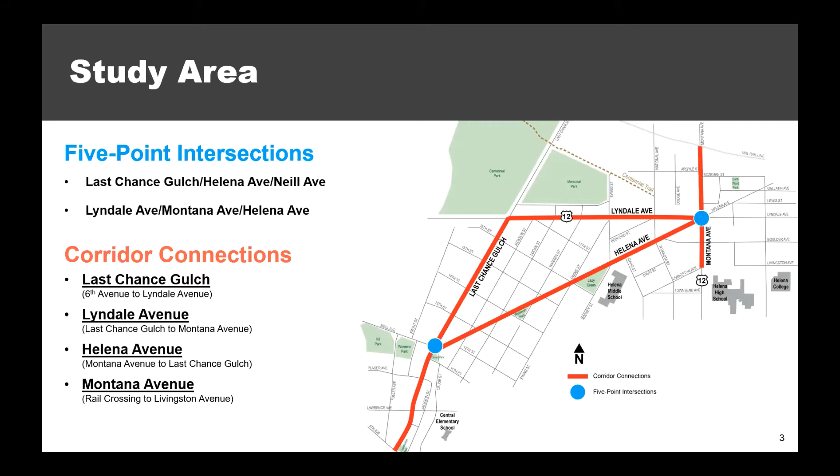So next, I mentioned that we conducted public and stakeholder outreach activities earlier in the process to understand the issues and concerns from your perspective. Starting back in June 2018 through the end of last year, we offered a variety of public and stakeholder activities just to request input on things like the focus for the study. We wanted to provide an overview of our study process and share existing conditions findings. And then we also discussed some of our initial areas of focus.

And these conversations helped us understand the issues and the needs, and we received valuable feedback on improvement areas. So from those public and stakeholder outreach activities, we heard a number of common themes that were repeated by quite a few individuals.

And most of the comments that we heard related to things like ensuring safety for all users, improving pedestrian and bicycle connectivity and accessibility, improving vehicular mobility and connectivity. We also heard a lot about extending Centennial Trail to the east across Montana Avenue, and the importance of preserving the function and access and parking for businesses and private property. And then lastly, we also heard about the need to improve wayfinding and aesthetics through things like signage and general beautification.

So with that, I'm going to turn it over to Scott Randall, who will discuss the recommendations included in the study. Great, thank you, Sarah. So I'm going to move into a discussion of the study recommendations, kind of the meat of the report here. So based on our findings and the feedback we have received throughout this process, we identified about 16 locations where we have some sort of a recommendation within the study. The recommendations range from pedestrian, bicycle, and general non-motorized improvements to intersection improvements, street enhancements, and more major reconstruction recommendations.

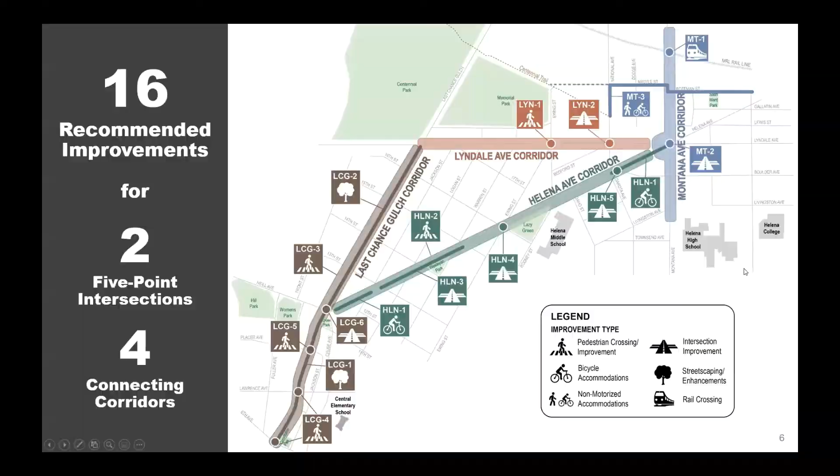So beginning with the Last Chance Gulch corridor, our first recommendation focuses on the segment between Neill Avenue and 6th Avenue, so the one-way segment. For this study, we were tasked with evaluating that portion of Last Chance Gulch to see if it should be converted to two-way traffic or if the current configuration should remain in place. So two-way conversion has been contemplated for a number of years in the community. And with this study, we were asked to figure out what the best solution would be to optimize business access and maintain traffic circulation and understand the impacts of what any changes would have on the surrounding corridor.

So we looked at a variety of configurations in detail. What we found is that most options would perform fairly well from a traffic standpoint if we're just looking at vehicles. However, the existing configuration as it is today provides valuable access for businesses, for parking, for loading and unloading and delivery needs. And also when we think about non-motorized accommodations, we felt that bicycle routing through the downtown area could be better accommodated on parallel routes such as Cruse and Fuller Avenues instead of focusing them on Last Chance Gulch. So our outreach with the public and with stakeholders also didn't really identify strong support for converting the current configuration to two-way traffic flow, nor was there support for removing a travel lane or adding additional bike facilities on Last Chance Gulch itself.

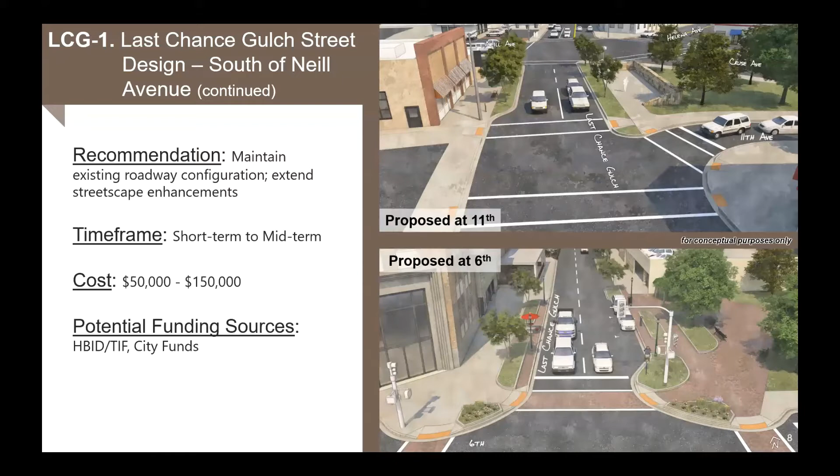So for these reasons, the study recommends maintaining the current two-lane one-way configuration and looking for opportunities to enhance what is out there today. So more specifically, we noted some recommendations to extend some streetscaping enhancements on Last Chance Gulch, particularly between Placer and Neill. This would help provide more of a gateway feeling into the downtown core and create more uniformity along the corridor. This recommendation could be more of a short to midterm project with a relatively modest cost as opposed to full reconstruction.

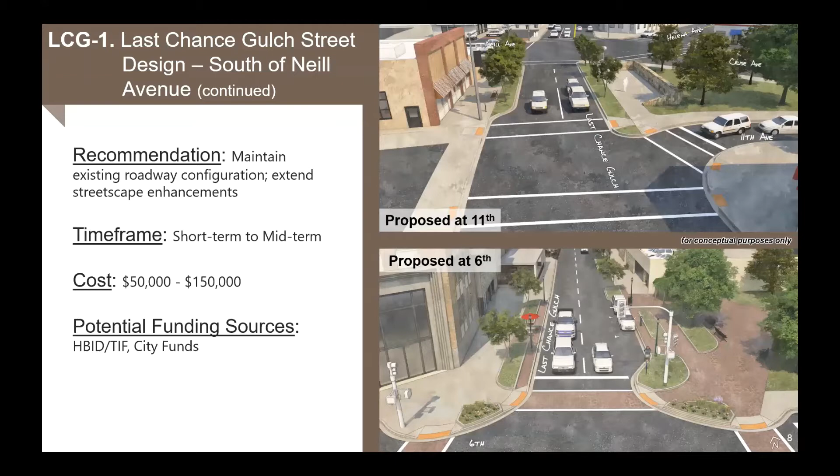So moving on, we also looked at the potential for improvements on Last Chance Gulch to the north of Neill, between Neill and Lyndale Avenue. Although we don't believe modifications to the roadway configuration itself are needed, we are recommending that streetscaping improvements be made to enhance the roadway corridor and better match the character and context of the area. The existing facility is pretty wide and feels fairly disconnected from the rest of the downtown and rest of Last Chance Gulch. So there is opportunity to enhance the roadway to improve the look and the feel of the corridor.

Improvements could include better signage, lighting, street trees, landscaping. You know, in this area, there's on-street parking up and down the corridor, but it's fairly limited in its use and need in certain areas. So some areas are heavily used for on-street parking and some are not.

So I think there's some opportunity to maybe reimagine some of those spaces into more green space, to provide for a traffic calming effect and to provide buffered protection between vehicular lanes and the pedestrian facilities. So this is a recommendation that wouldn't be done overnight, likely wouldn't be done as redoing the entire corridor at once, but could be achieved as smaller standalone pieces or as redevelopment of the area occurs.

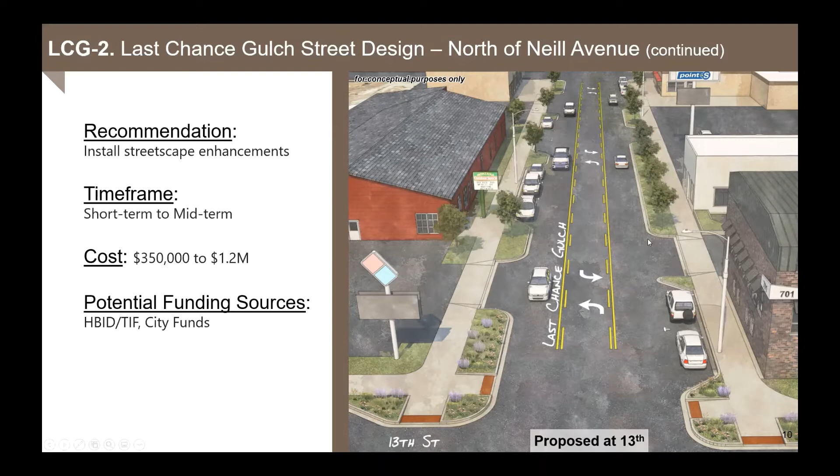The next recommendations along Last Chance Gulch corridor focus specifically on pedestrians. We observed and heard a lot from folks about the condition of some of the sidewalks. Some of the concrete is cracked or chipped. There's some accessibility barriers. And so in general, we're recommending that general sidewalk improvements to address these hazards are made. We feel that these improvements would be very beneficial, given the pedestrian focus in the downtown core.

We also looked at the major intersections, in particular the two signalized intersections with 6th Avenue and with Lawrence Street. What we're recommending at those intersections is what's called a leading pedestrian interval, which is a change in the signal timing, which actually gives a bit of a head start or priority to pedestrians crossing versus giving a green light to vehicles and pedestrians at the same time. You would actually give the pedestrians about a 3 to 5 second head start before you give a green light to vehicles. This would reduce the amount of unprotected time pedestrians spend in the intersection and also increases their visibility.

And if we move just up the street to the intersection with Placer Avenue, this is another location where we're recommending some improvements specific to pedestrians. We're recommending that the intersection be upgraded to comply with current ADA standards, which includes curb ramps and bulb outs and some enhanced crossing treatments there to more match the intersections at 6th and at Lawrence Street.

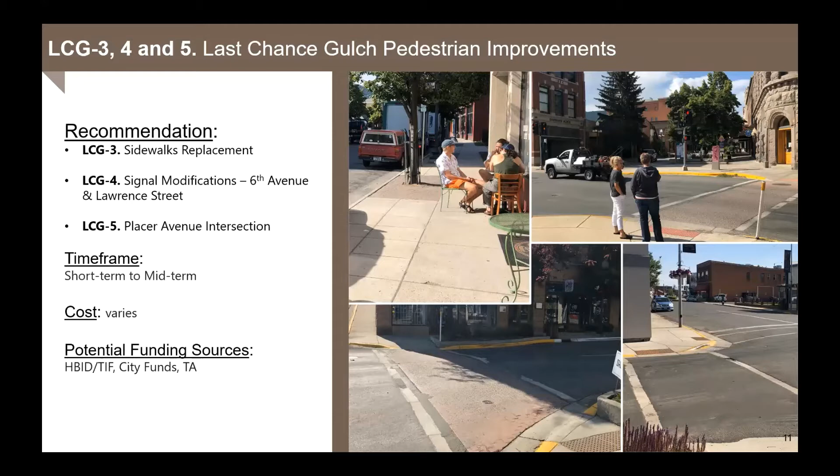Additionally, the intersection is not particularly friendly or easy to use for pedestrians or bicyclists, especially with the awkward triangle refuge near the Helena Avenue right turn slip lane. So as a potential short-term solution, we're recommending that you look at maybe removing that right turn slip lane and that triangle refuge at the corner of Cruse and Helena. This would allow for the corner to be reconfigured to improve the crossing for pedestrians. Additionally, there's an opportunity for some beautification on the north leg of Last Chance Gulch as you enter the downtown core. While this option wouldn't improve traffic conditions or really change specific conditions for vehicles, it does offer small scale improvements to better enhance the intersection and make it more walkable.

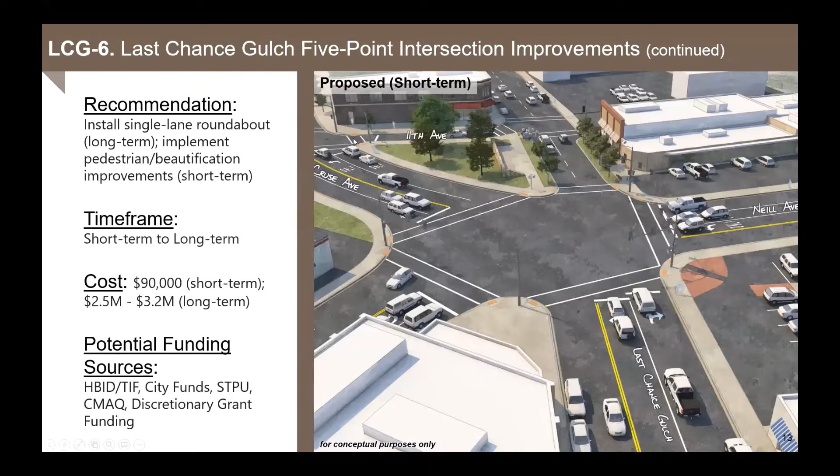We also evaluated a lot of long-term options to address long-term identified concerns. So we looked at a number of options from modifying the traffic signal as it is there today to closing the 11th Avenue spur into a roundabout. And the results of the evaluation process resulted in a roundabout being identified as the preferred configuration for a number of reasons. Over the long term, this option is projected to optimize vehicular operations, non-motorized access, and would offer the opportunity for beautification and to have the intersection serve more as a gateway feature into the downtown.

Also, with a roundabout, the 11th Avenue spur could be closed, which could provide for an opportunity to enhance the Cruse Park. This slide shows a rendering of what that could look like at this intersection. The configuration would operate very well now and into the future, given our existing and projected traffic volumes. It would also minimize impacts to adjacent properties. So I think that this configuration would still maintain most business access points while improving the intersection from an operational and non-motorized standpoint.

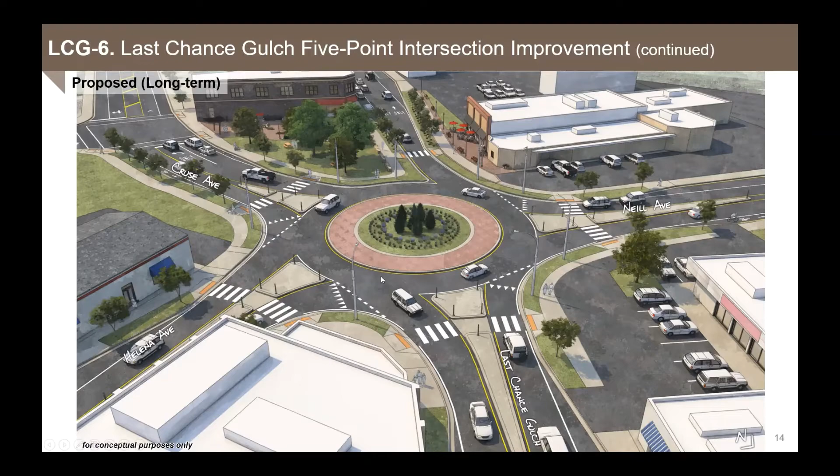Moving on to the Lyndale Avenue corridor, we focused less specifically on this roadway as it is part of US Highway 12 and in the jurisdiction of the Department of Transportation and not the city. However, we did hear quite a bit about some of the difficulties, particularly with crossing this roadway as a pedestrian. There is currently a marked crosswalk at the intersection with Warren Avenue, although it has been noted it's very difficult to see. It's very basic with just some pavement markings and some signing, and does not provide enough protection for crossing pedestrians.

So with that in mind, we took a broader look at the corridor to identify the best spot for a pedestrian crossing. In the end, we're actually recommending that the current crossing location at Warren be removed and an enhanced crossing be developed at the intersection just down the road at Ewing Street and Rodney Street instead. This spot provides an opportunity to better connect with Centennial Trail, the baseball field, and Helena Middle School, and is actually the center point between the intersection with Last Chance Gulch and the 5-point intersection to the east.

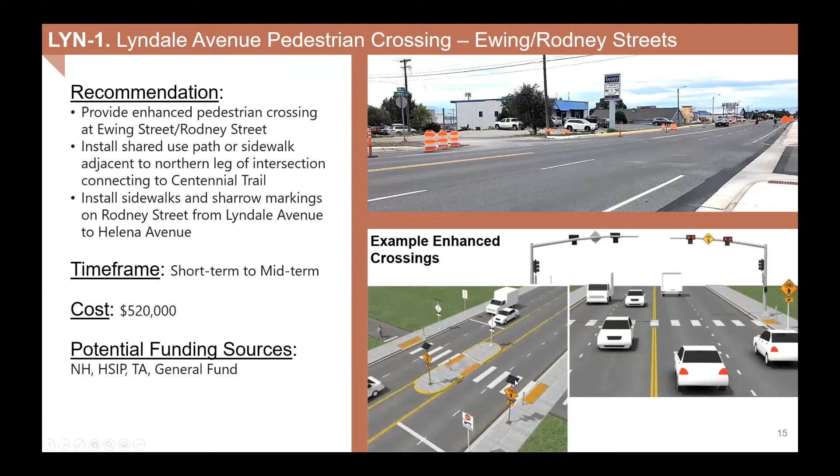The bottom images shown here are examples of what an enhanced crossing could look like. We don't know exactly, depending on certain considerations, what that would look like. But here's a couple ideas of what an enhanced crossing could be versus the crossing as it is today, which just has some signage and pavement markings. So additional investigation would be needed moving forward to determine exactly what that looks like. But here's a couple ideas.

So next up is Helena Avenue. The next two recommendations are for improvements to the bike and pedestrian facilities on Helena Avenue. Currently the bike lanes end quite a ways before the 5-point intersections on each end without much of a transition or warning to bicyclists. This recommendation would extend the bike lanes closer to the intersections and provide some transition signage to guide bikes to take the travel lane to maneuver through the intersections.

And from a pedestrian standpoint, there's several locations where sidewalks are missing or damaged or where accessible features are not provided. In several cases, parking lots are paved right up to the curb line, which provides no separation between vehicles and pedestrians. In this study, we've identified quite a few spot locations for sidewalk and curb ramp improvements. This may be accomplished in the short to midterm and would greatly enhance access and connectivity on this corridor for pedestrians.

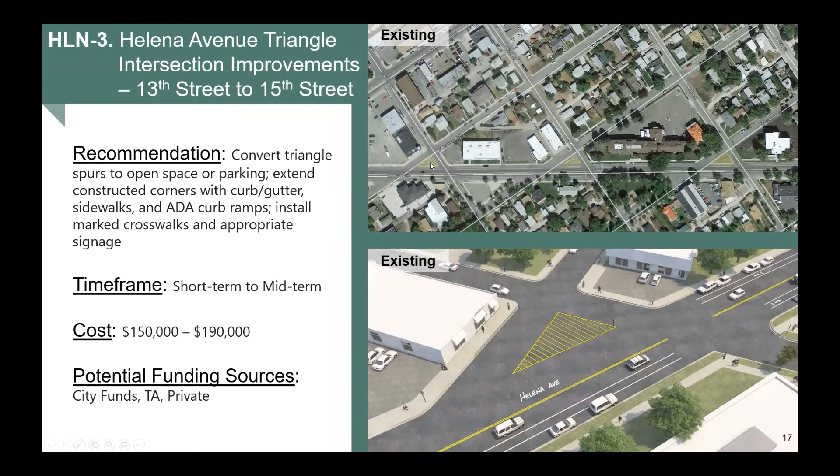To improve these three spots, the study recommends extending the curb line, adding marked crosswalks and bulb outs as appropriate to improve pedestrian visibility and comfort, and converting the former triangle areas to parking or green space to benefit adjacent businesses and residents. This slide shows a couple of examples of what these could look like. The top one shows the extra space of the triangle intersection reimagined into additional building frontage, while the bottom one shows what it could be if it was envisioned more as a public space.

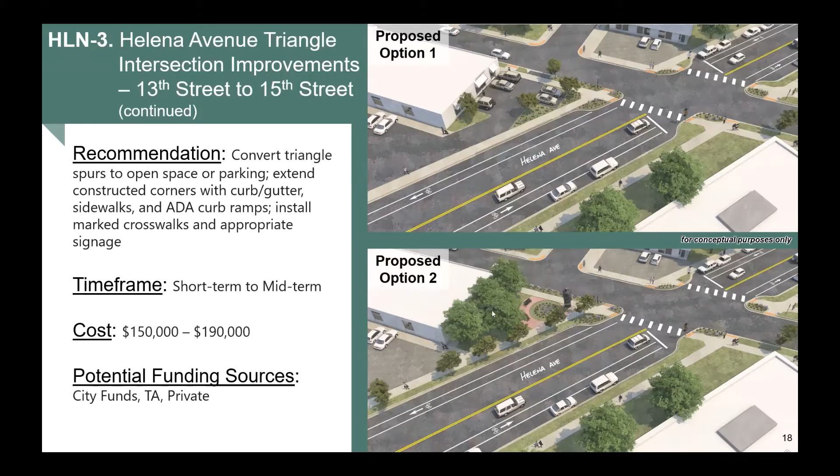The next couple of options are also aimed at some of the skewed intersections along Helena Avenue. At the intersection with 16th Street and Ewing Street, for example, there are long crossing distances here as well. The intersection operates almost like a 6-point intersection given how closely spaced all of these intersections are.

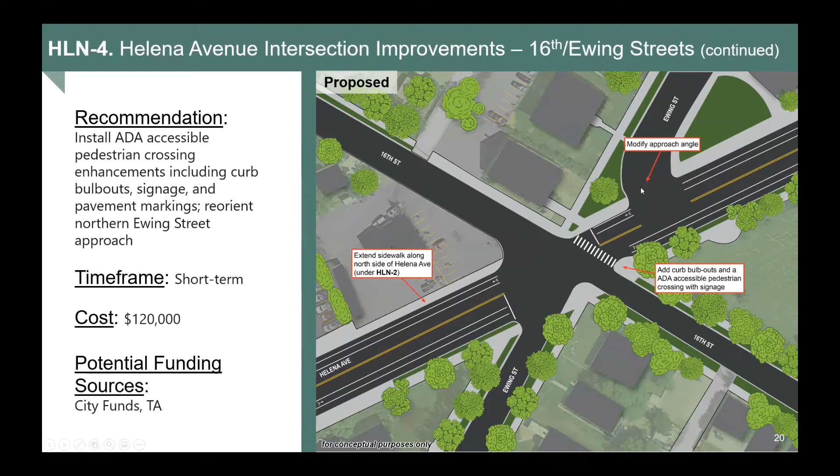To address some of these poor geometrics and some of the needs for pedestrians, the study recommends providing a marked crosswalk with curbed bulb outs and ADA ramps to improve pedestrian crossing visibility and comfort. Additionally, we suggest modifying the northern leg of Ewing Street to intersect Helena Avenue at more of a right angle to improve visibility and give better definition and distance from the intersection with 16th Street.

Moving further northeast, the National Avenue and Boulder Avenue intersection also has some of the same problems and challenges in terms of its awkward intersection angles, poor visibility and long crossing distances for pedestrians. So what we're recommending here is to, again, install a marked crosswalk across Helena Avenue with curb bulb outs to make it safer and more comfortable for pedestrians to cross. We'd also suggest squaring up Boulder Avenue to improve visibility and give some distance and more definition between the intersection with National Avenue just down the road.

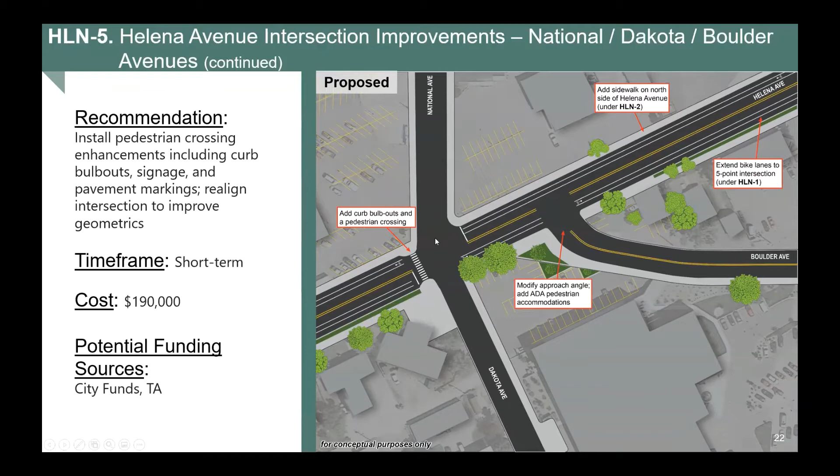Moving to our last corridor, Montana Avenue, we've all heard for a long time about the need for a grade separated railroad crossing on Montana Avenue. The existing at-grade crossing really disrupts vehicular travel on Montana Avenue several times a day. It can create very long queues spilling back to the 5-point intersection. The crossing is a high priority, certainly for the city of Helena and for MDT, to reduce congestion and improve safety. Several previous studies have been developed and identified the need for improvements at this location, the most recent being the 2016 Montana Rail Grade Separation Study that was developed by MDT. Our study supports the findings of this document and recommends construction of a grade separated crossing at this location.

Of course, as with any large project, the biggest obstacle to making this happen is funding. This would be a very expensive improvement, and while traditional funding from MDT likely won't be available for a number of years, given other needs across the state, there are some opportunities to explore other funding mechanisms, such as grant opportunities and other ways to pursue development of this in the meantime.

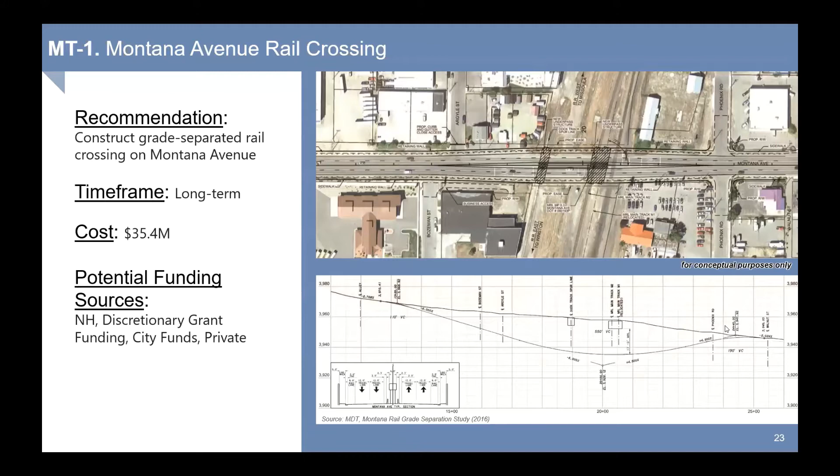That leads us to the last major intersection evaluated in the study, the 5-point intersection with Lyndale Avenue, Helena Avenue, and Montana Avenue. Again, although this intersection generally operates fairly well if you're just looking at it from a vehicular standpoint, the signal phasing does create some inefficiencies. There's a lot of waiting for the lights to change, and the intersection is quite a barrier for non-motorized users. We heard from quite a few folks that the intersection is also a barrier in general for the 6th Ward area, since vehicles on Lyndale Avenue coming from the west are not allowed to make a left turn either onto Helena or onto Montana Avenues.

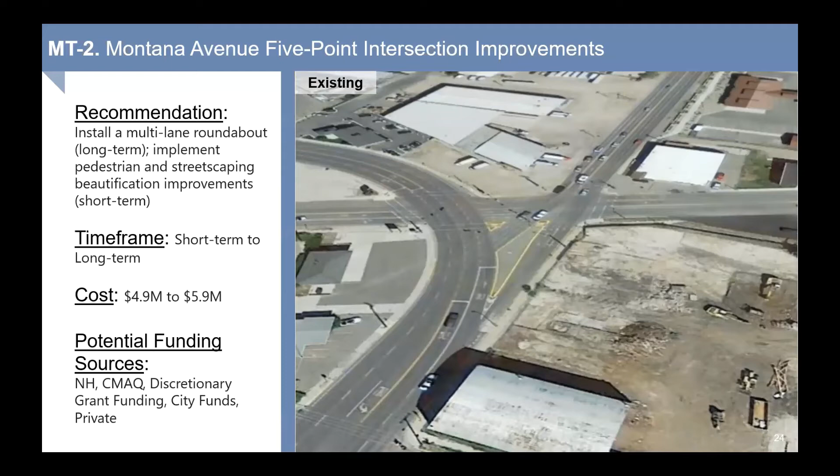We studied a range of options, again, at this location, including maintaining the existing layout, reconfiguring the traffic signal with additional turn lanes, creating a 4-legged intersection by closing Helena Avenue, and installation of a roundabout. After thoroughly evaluating the pros and cons of all these options, the roundabout configuration again was shown as the best to balance the operational and access needs of the intersection. A roundabout would also offer opportunity for beautification of the intersection and adjacent areas.

And while this option would definitely be costly and more of a long-term visionary improvement, it would accommodate existing and projected traffic demands, improve pedestrian accommodations, and allow for all turning movements to be made. While the roundabout configuration is larger than the current intersection footprint, there are some open lands and areas that could be used to make the configuration fit. However, it is still likely that there could be some general impacts on the intersection corners and some modifications to business accesses.

Our last recommendation focuses on the Centennial Trail. Currently, the trail ends abruptly at National Avenue, and the study was tasked with finding the best route for crossing Montana Avenue and continuing the trail to the east. So we looked at several options for doing this, including routing further to the north and to the south, and ultimately, to maintain the look and feel and comfort of a shared use path meant for families and to minimize out of direction travel, the study recommends routing travel along Argyle Street with a new crossing across Montana Avenue at the Argyle Street, Bozeman Street intersection. This would allow the best spacing between the 5-point intersection and the at-grade railroad crossing.

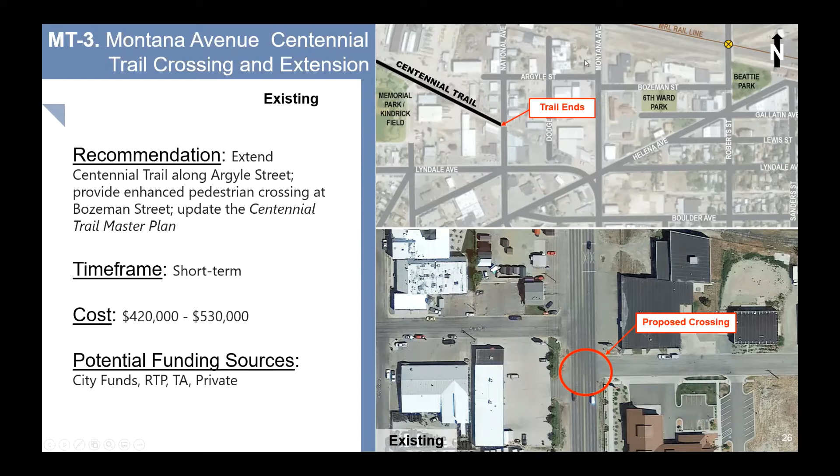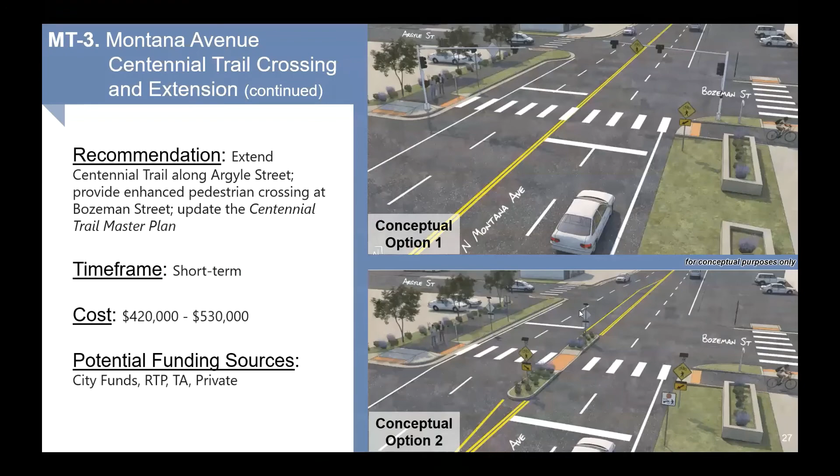So next up from Richard, saying it seemed to him that the proposed roundabout at Malfunction Junction forces traffic that wants to go beyond the first available exit to change to the inside lane and then back to an outside lane to exit. How is that safer? So really the layout of this roundabout is fairly similar to what's out there today. Probably the biggest difference would be on the south leg as you're going north on Montana Avenue.

So if you can see my illustration on the screen here, right now we kind of have that weird... actually, let me see if I can pull this up. Hopefully you can see my screen here, okay?

So as it is today, we have the two northbound lanes on Montana Avenue, and you can stay in both of those lanes to go and maintain on the highway. But the right-hand lane also goes and splits onto Montana Avenue to continue straight.

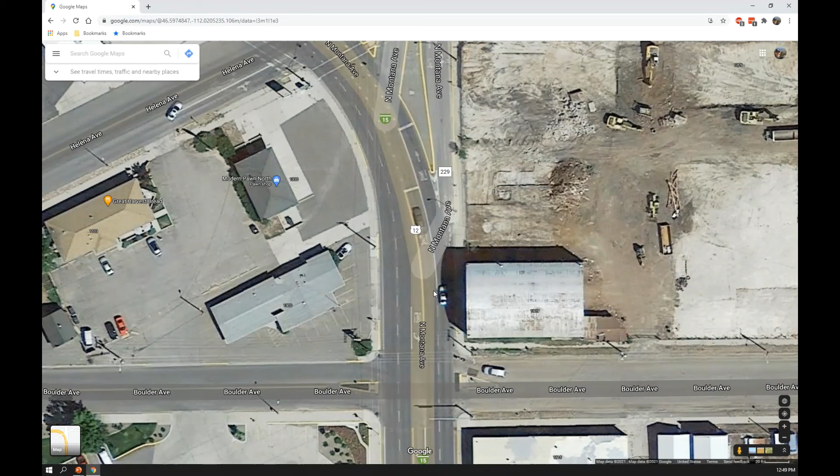So with the roundabout configuration, and again, this is still high-level concept at this point, but with that configuration, the idea would be that the left-hand lane would maintain traffic on the highway, and then the right-hand lane would maintain traffic on Montana Avenue. So if you're wanting to go left, you would be in the left lane like you typically would at most intersections, where you can circle through there. But if you're in the right-hand lane, you would not be able to cross over and turn left, at least how this is laid out.

There are some variations where we could allow both of those lanes to turn left by making some modifications on this northern end that could be vetted out through project development. But as we have this shown today, it would basically be left-hand lane would be highway traffic, right-hand lane would be traffic on Montana Avenue.

And then regarding the other lanes, as far as how those would work, they basically function exactly as they do today, with the difference being just you're going around a little bit of a circle versus straight. The other difference would be that coming on from Lyndale Avenue, going east into the intersection, instead of only being allowed to take a right turn, if you're in that left-hand lane, you would then be able to continue on to Helena Avenue or to take a left onto Montana Avenue.

Okay, great. So no more open questions just yet, but we'll wait a few more minutes. Okay, well, we don't want to cut anyone off, so we'll just ask for kind of last call for questions here, if there's anything else that you'd like to comment or offer your thoughts.

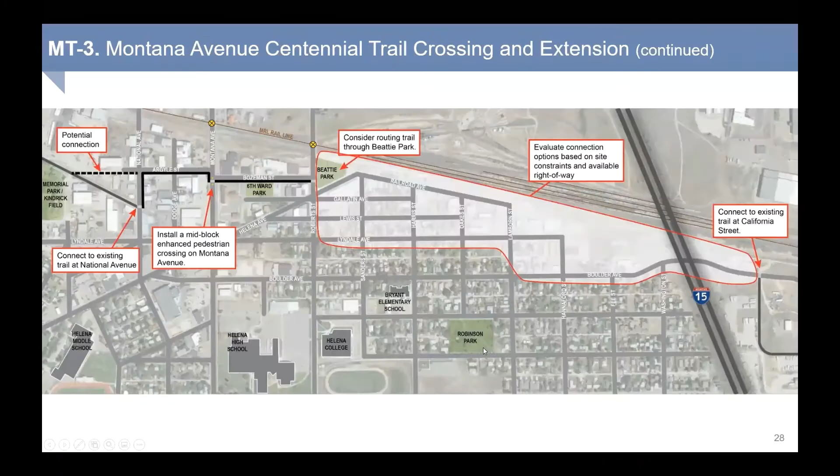Oh, I'm sorry, it looks like we've got a couple more comments here coming through. So Chris is just commenting, great professional presentation, and thanks, he'd like to see this moving forward. Chris, thanks for that feedback, appreciate it. Richard did have one more question. If you are heading north on Montana Avenue, can you exit the roundabout to Helena Avenue?

So I'm assuming you're probably talking about, well, from a right-hand turn standpoint, yes, you can. If you're going north and want to take a right, you can definitely do that. As far as this leg goes, taking a left basically onto Helena Avenue, there are some concerns about crossing movements to make that happen.

I think there's some tweaks that could be made to this roundabout to make that function, but that is an extremely low volume or low priority movement, knowing that you can take a left on Boulder and everybody uses that connection. So I don't know that I can say definitively yes or no on that. That would have to be vetted out through the design process, but that might be one of those movements that we could restrict just to make it function better for everybody else, knowing that it's such a low volume movement and a low priority.